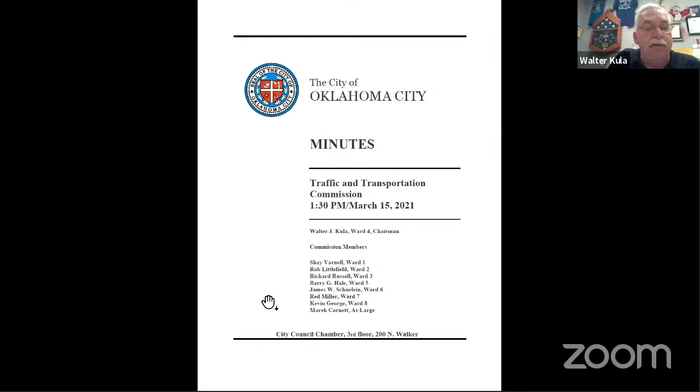We'll go ahead and get the meeting to order. First item after call to order is approval of the meeting minutes of the March 15, 2021 meeting. Do we have a motion concerning this item? I can move approval, Kevin George. Varnell seconds. Okay, so we have a motion to approve from George and seconded by Varnell. Let's get that up. There's George, there's Varnell. Okay, do we have any talk on this item? All right, so we have a motion to approve the meeting minutes of March 15, 2021 by Commissioner George and seconded by Commissioner Varnell. Can we please have the voting screen?

So this is where you would press escape on your keyboard. Jill, will you open the vote back up? Not everybody had a chance to vote. Okay, so if you're still just seeing the item at the top and where it says moved by Mr. George and seconded by Mr. Varnell in the middle, that's your Zoom screen. So you need to press escape on your keyboard, and you may have to click on your Chrome or whatever internet browser you're using on the icon on your start bar to bring up PrimeGov. And then you should have your buttons. Not happening for me, it didn't come up for me. Am I the only one not getting it? I'm not getting a voting screen. I'm sorry.

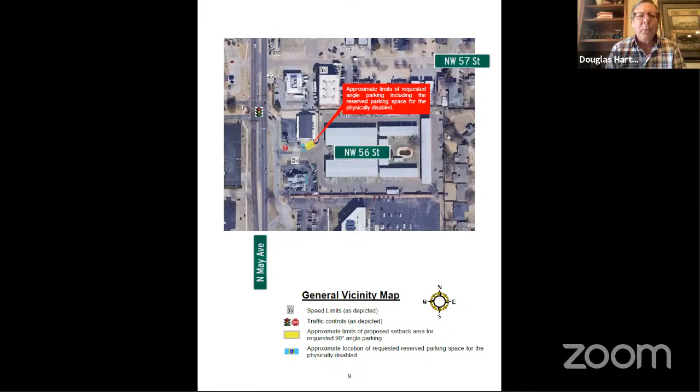Very good. This particular site is a dentist office, Pinkston Dental. It is surrounded by apartments and other offices and building types, so there's no room for him to expand his parking. He barely meets code now, but he would like to expand parking, and all he can figure out is he can get 1 additional one on his site, and he would like to add these 3 that are on Northwest 56th Street.

All right, very good. Thank you, sir. Do we have anybody else wanting to speak on item 5A? Okay, staff, can we have your input, please?

All right, well, you've got our comments before you. This is a rather unusual application because it's parking that is on the perimeter of a portion of a cul-de-sac. When we were researching into this matter, finding information or other examples of something similar to this in the U.S., it's rare. So this is kind of an unusual one for your consideration.

Action on this particular case will be at the discretion of the commission. As proposed, the 90-degree angle parking on the north side of Northwest 56th Street appears to meet or exceed our proposed angle parking standards with respect to the minimum perpendicular parking stall depths. We're not anticipating that the introduction of the angle parking area at this location is going to have a meaningful effect on traffic movement. The number of reserved spaces provided for the physically disabled, which in a small area like this is 1, would appear to meet the ADA requirements.

So at this point in time, the applicant hasn't requested any sort of restricted use for the parking spaces, whether it's time limited or otherwise. So if recommended for approval, a motion needs to include the applicant dedicating public right-of-way or roadway easement sufficient to fully cover the proposed setback parking spaces and sidewalks, and then the applicant bearing the responsibility for the preparation of the construction documents.

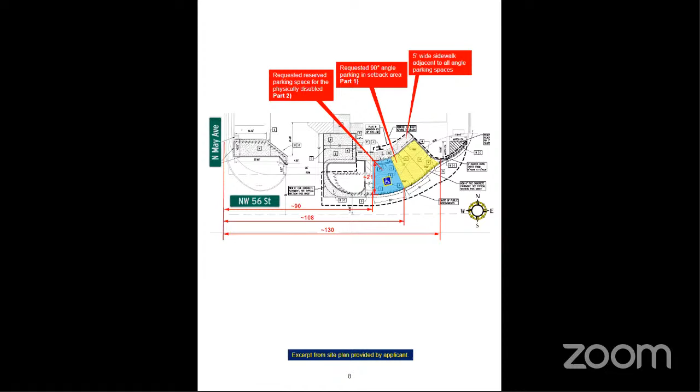And if you've got any questions on this matter, I'd be happy to answer them at this time. All right, thank you very much, sir. Do we have a motion concerning this item? Could you make it verbal to start with so we make sure we get the record. I move for approval.

I'm sorry, say that again, Mr. Littlefield. I move for approval, which includes staff comments? Yes, which includes the dedication of public right-of-way easement with the additional language and bearing the responsibility of the preparation of public improvements, construction, and the balance of the language.

Okay, and I show a second by Commissioner Varnell. Do we have any talk on this item? Nope. I'm sorry, it sounded like somebody might have been talking. No, I think no comment from me. Okay, very good. So we have a motion to approve item 5A from Commissioner Littlefield, seconded by Commissioner Varnell, to include staff recommendations.

Can we have the voting buttons, please? Kula votes yes. Mr. Littlefield, yes. Okay, item 5A has passed with all 7 voting in favor of passing. Thank you very much. Thank you for your time.

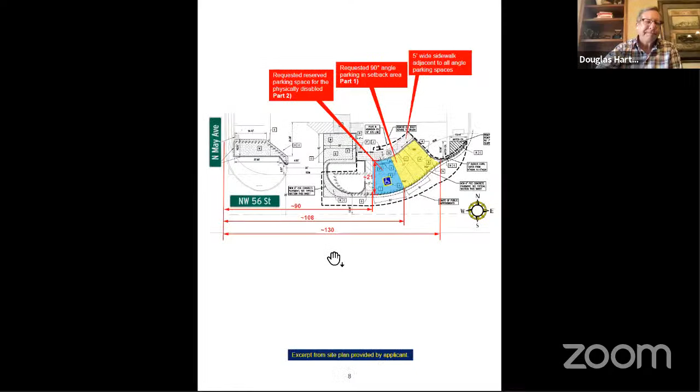Okay, now we'll go on to item 5B. Craig Sanger. Consider request to change the speed limit on North Villa Avenue between Northwest Expressway and Northwest 63rd Street from 30 miles per hour to 25 miles per hour. We have a speaker for this one.

Yes, Craig Sanger. Hi, sir. If I can have your name, address, and you have up to 5 minutes, please. Thank you, everybody, for your consideration and time. My name is Craig Sanger. I live at 2424 Northwest 56th Street in Oklahoma City. And I'm requesting that North Villa Avenue between 63rd Street and Northwest Expressway drop to 25 miles an hour. It's currently at 30. The street connects 2 major neighborhoods, Belle Isle West and Wildman's Belle Isle.

It's bookended with Belle Isle Middle School on the northern side, and the Belle Isle Library on the southern side. It's a very active community, lots of runners and walkers and strollers and bicycles. But this particular stretch of street, North Villa, does not have any sidewalks, so it's quite dangerous for the community to get out there while people are traveling down the street. 30 miles an hour doesn't seem like it's that fast, but I don't have any scientific data to back it up, but just from the eyeball test, it looks like people travel pretty quickly down this stretch of road. I think dropping it down to 25 might make it a little safer for the community and everybody that lives in the area. Thank you for your consideration.

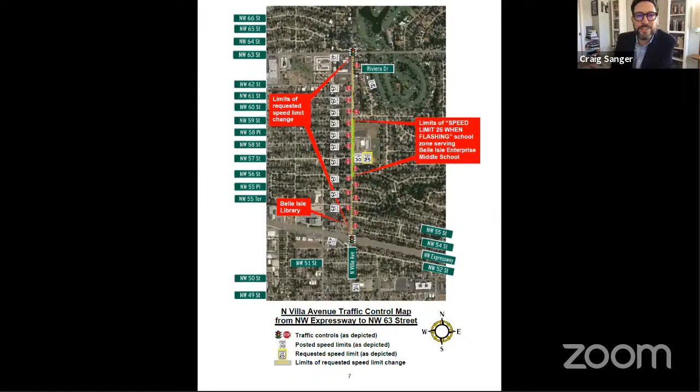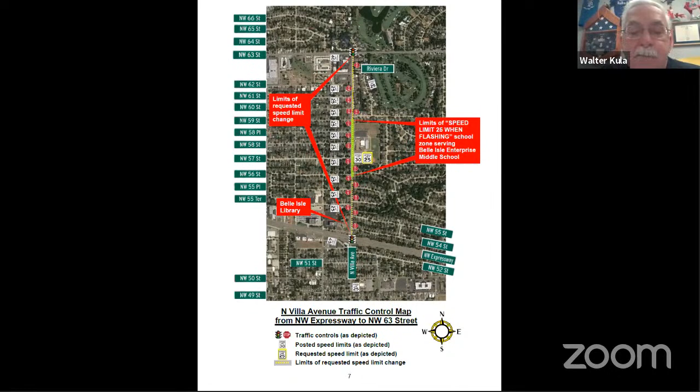All right, so thank you. Does anybody else want to speak on item 5B? Okay, staff, if you could provide input, please. All right, you've got our comments before you.

Up on your screen right now is the speed analysis that we had done in preparation for this particular case. You'll see the way that this road is currently posted at 30, that about 60% of drivers are currently traveling at or below the currently posted limit. In the range of 25 miles an hour, of course, it's posted above that. You're getting about 25% thereabouts of drivers traveling at that. Our observed 85th percentile speed is running right around 34.

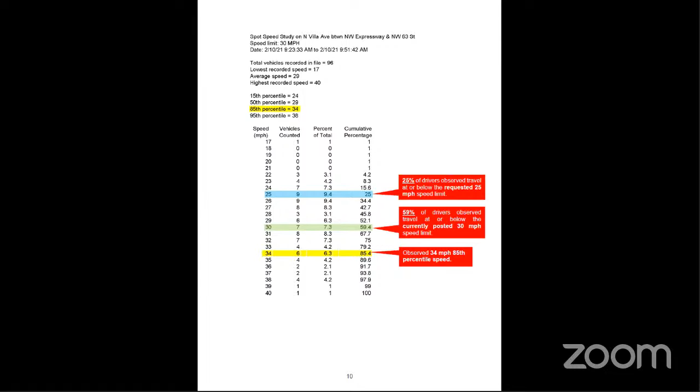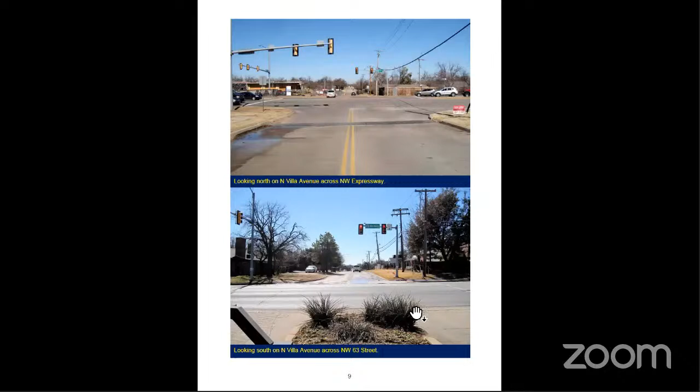All right, thank you very much. Do we have a motion concerning item 5B? For the purpose of initiating conversation, I move for approval. Okay, we have a motion for approval for item 5B from Commissioner Littlefield. I'll second. We have a second by Commissioner Cornett.

Okay, who would like to speak about this? I'd like to make a couple of comments, if that's all right. Yes, sir.

With the study that Stuart mentioned, it seems like no matter what speed limit we post, people are going to drive the way they feel the road ought to be. From the data presented, it seems like a lot of people feel the limit ought to be 35, not 30. Even if we changed the speed limit to 25, there's a good percentage of people that are going to continue driving regardless of what's posted. So I'm not sure posting at 25 will achieve what you're trying to achieve, which is to get people to slow down, because we've got people on that stretch of road right now willing to exceed what's posted.

All right, thank you, sir. Anybody else want to speak? Mr. Littlefield, you got your hand up?

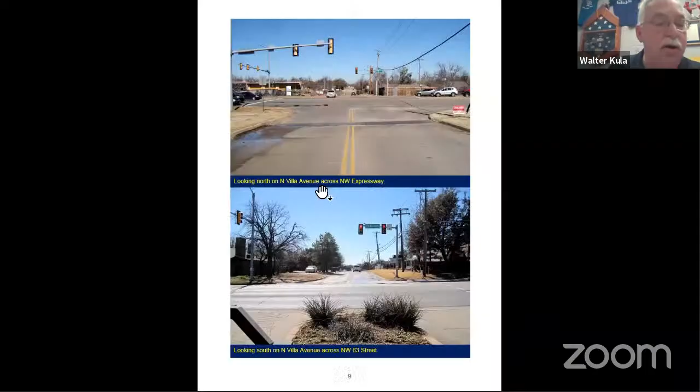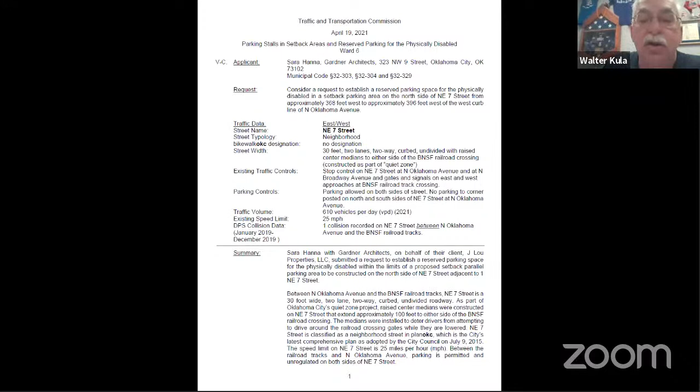Okay, we now move on to item 5C. Sara Hanna, Gardner Architects, to consider a request to establish a reserved parking space for the physically disabled in a setback parking area on the north side of Northeast 7th Street, from approximately 368 feet west to approximately 396 feet west of the west curb line of North Oklahoma Avenue.

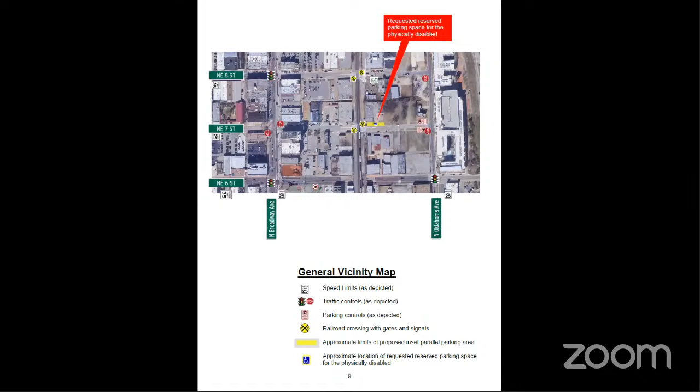I don't want to take too much of your time, but I thought I'd just say that this new development that's going to be located here is taking an existing building and turning it into a multi-tenant development, including a brewery, restaurant, and office spaces. It's something we're really excited for, and we think it's going to be really great for the community. I'm here for any questions if you have them.

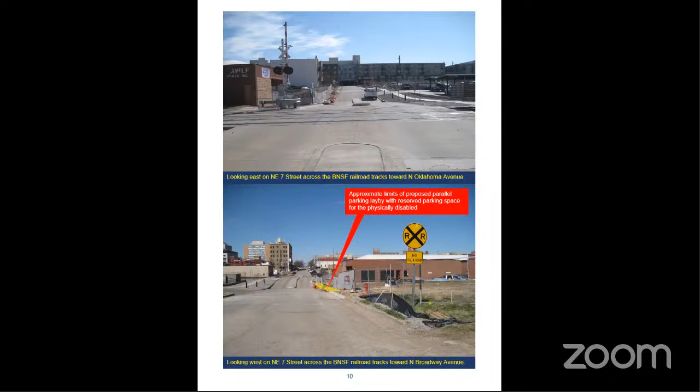All right, you've got our summary comments before you. Action on this item is at the discretion of the commission. The applicant is proposing an inset parallel parking area, and you can see where the reserved space for the physically disabled is located. It would meet the number of spaces required for the block for ADA compliance purposes. At this time, the applicant has not requested any form of regulatory parking controls to control the use of this space. So if recommended for approval, a motion should include the condition that the applicant bear responsibility for the preparation of the construction improvement plans. In this particular case, ordinarily we would comment on the need for additional right-of-way to cover the required sidewalk, but here it's all being proposed within the limits of existing right-of-way. I'm happy to answer any questions you may have.

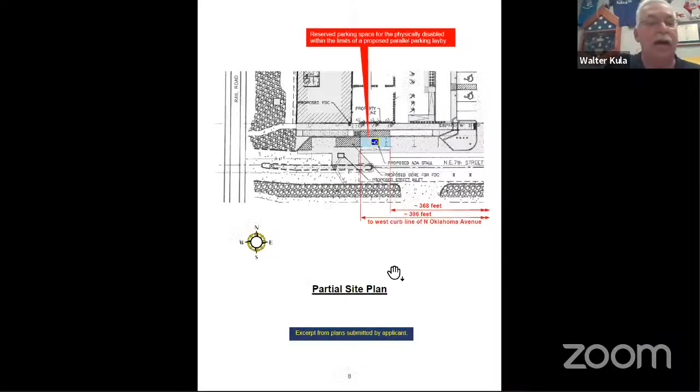The item is 5D. Lauren Gardner to consider a request for the addition of stop control on North Harvey Avenue at Northwest 14th Street to establish all-way stop control. Do we have someone to speak on this item?

Yes, sir, hi there. Can I have your name and your address, and you'll have up to 5 minutes, please. Thank you, sir. My name is Lauren Gardner. My address is 2636 Northwest 58th Street.

My children attend the daycare at St. Luke's, which has a loading zone on Harvey that takes up about the whole space from 14th to 15th on the east side of the road. I put in this request for a four-way stop sign with the input of many parents that I've spoken to, neighbors, some of which are on this call and have also signed up to speak, and church leadership.

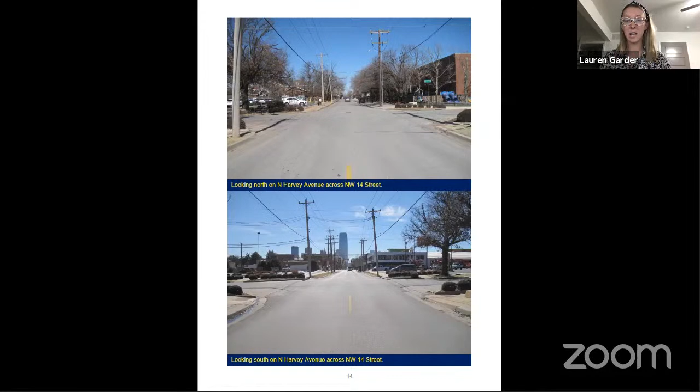And I certainly appreciate the traffic study that says the highest speed was 31. I don't know what time they did that study, I'm sure they can tell us, but I'll tell you my experience at peak pickup and drop off hours, so 6 to 8:30, and then about 4 until the center closes at 6. This is a regular problem where I'm trying to load my small children amid the 200 plus other children.

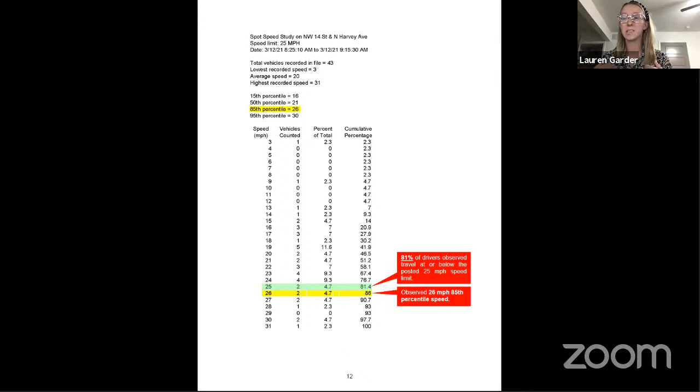And we just want to be safe, and we want increased barriers to speeding and a reduced likelihood that one of our children, or us, or a teacher, or somebody who's visiting the church would be seriously harmed by the chronic reckless drivers. So I appreciate you all considering this item and allowing me the opportunity to speak, and I'm here for any questions that you might have.

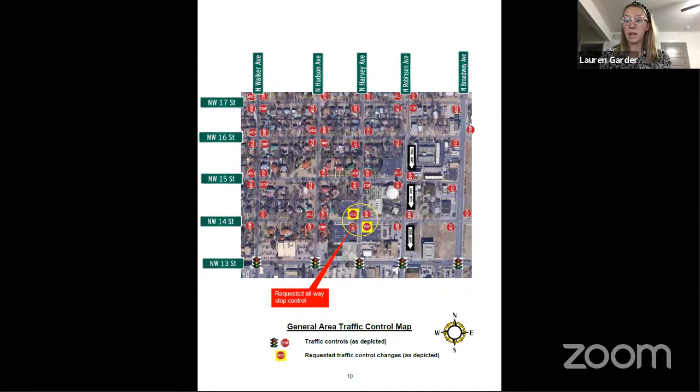All right, thank you very much, ma'am. I'm sorry, but I can't see on my screen the pop-up of who's signed up to speak, so if somebody else would like to speak, let me hear you. Good afternoon.

Okay, Mr. Greenwald, we'll need your name, address, and you have up to 5 minutes, sir. Thank you. My name is Phil Greenwald, and I serve as the executive pastor and chief financial officer for St. Luke's United Methodist Church, located at 222 Northwest 15th Street in Oklahoma City.

I'm also the corporate representative for the St. Luke's Children's Centers. We greatly appreciate the grassroots efforts of Ms. Garder and others to propose a four-way stop at Harvey and 14th Street. St. Luke's supports the proposal and appreciates your consideration today.

We recognize the traffic statistics may not support this request. However, those do not always convey the human story that you've heard Ms. Garder share behind the request. We're blessed to have more than 220 children under the age of 5 who enter and exit their parents' cars at this location twice a day between 14th and 15th Street.

We take very seriously their safety. We are not asking for flashing lights or a crosswalk, but simply stop signs as a way to encourage our friends and neighbors to slow down and to take notice of all the young lives at this location. We're grateful for your time and effort to review our request.

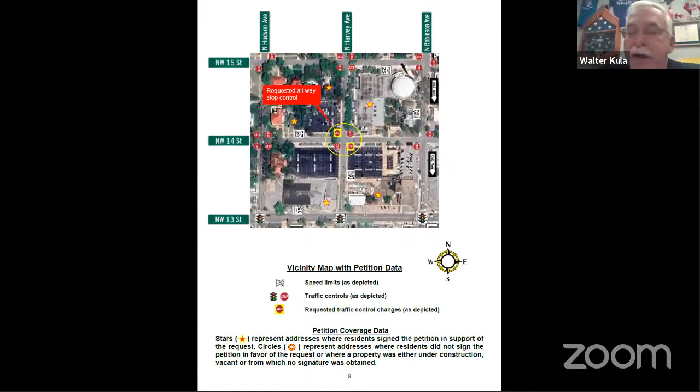Thank you. My address is 2521 Northwest 60th Street in Oklahoma City. I send my 2 children to St. Luke's on 14th and Harvey, and I work downtown at Ernst & Young. I don't want to take up too much of your time. I know we've already had a few people speak, but I did want to show the amount of support that we have from parents and members of the community.

At around 9 a.m. last Friday, we created an online petition just so we could show how many people are in support of this. We sent it mainly to parents and people in the neighborhood, and before the end of the day, within about 5 hours, we had over 140 people who supported this petition for an all-way stop. We're at over 150 right now.

Again, as the parent of 2 young children that attend St. Luke's, safety during pickup and drop off is supremely important to me, as it is no doubt to all the parents and caregivers of the over, I think, 220 children that attend the downtown campus. And there are obvious times of the day when the street is more congested than others during drop off and pickup, which also coincides with when people are probably in a rush to get to work, coming to and from downtown.

And the parking area for the St. Luke's daycare is on the west side of Harvey, so this leads to parents walking across Harvey, typically carrying at least one, and like me, 2 kids and all of their belongings. I've seen countless times when motorists are not obeying the speed limit and racing down Harvey, not paying attention to doors that are open while they're loading or unloading their children, or paying attention to the parents that are just trying to corral their kids in and out of the building.

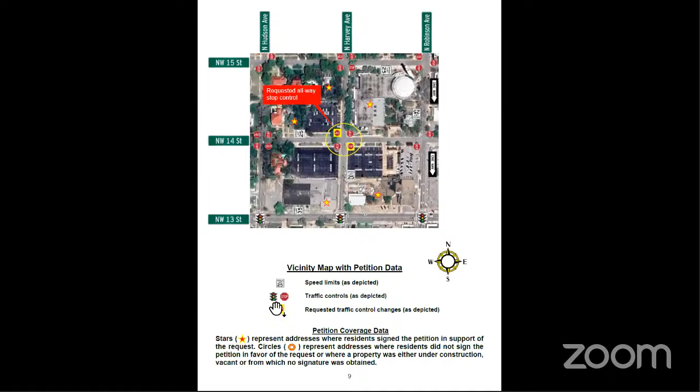So I hope that you all consider the addition of the all-way stop and see the support that we have gathered from the other parents, as I think a stop sign will make that section of Harvey safer for everybody, including the drivers headed northbound on Harvey and the parents who are in and out frequently using the loading zone. I think it would just force everybody to take a second to stop and take in their surroundings.

And we were originally going to ask a lot of parents to speak, but because of how many people seem to support it, we decided that maybe a petition would be a better use of your time. So thank you very much. All right, thank you very much, ma'am. Anybody else wanted to speak on this item?

Okay, we'll move on over to staff input. Staff, please. Well, you've got our comments before you. One item that did come up was use of warning flashers or something like that. The way the city's codes are structured, streets that are posted 25 miles an hour are not eligible for warning signals of that type. But with respect to the city and the MUTCD criteria regarding the use of all-way stop control, this particular intersection does not have a traffic volume that would meet that. There's not a collision history or experience at the location that would suggest that the use of an all-way stop is required. So action on this item will be at the discretion of the commission.

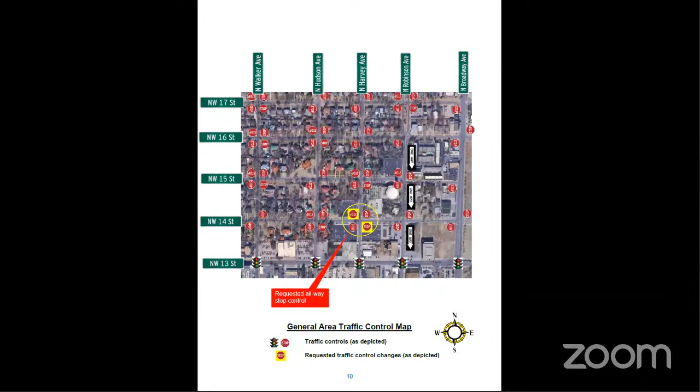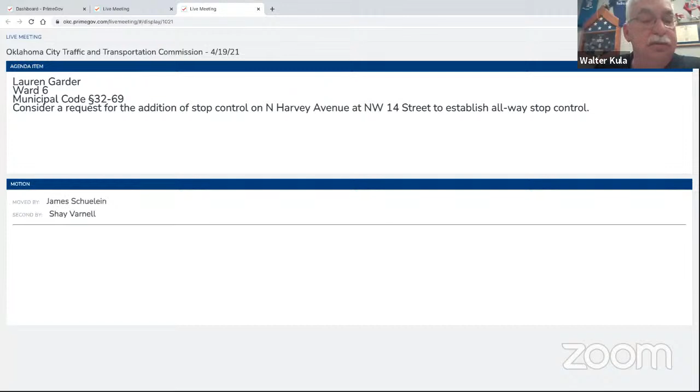All right, thank you very much, sir. Can I have a motion concerning item 5D, please? Mr. Chairman, I move the application be approved. We have a motion to approve item 5D from Commissioner Schuelein, and we're going to need a second here. Second from Commissioner Varnell. Do we have any talk on this item?

This is what a proposal should look like—the community, the people it affects most, coming together and presenting. Thank you for all the parents' work and the people who live around this area for coming together and putting together a good proposal for us, and for all the information.

Let's go to Ms. Cornett. Thanks, I just wanted some history since I'm new to the commission—coming up on a year now. A few years ago there was a master plan put into place for stop signs throughout Heritage Hills and Mesta Park, developed with a consultant. I was wondering if anyone could give historical context on why this intersection didn't make the cut then. I'm 100% in favor of approving this, especially because of the daycare—I've been down that street, it's right by my house, and I totally agree with the problem. But I don't want this used as leverage for another four-way stop elsewhere in the neighborhood, with every intersection becoming a four-way stop as traffic calming going forward, since that was already abused in my opinion when the master plan was passed. So I'd like to know if anyone can speak to that or was on the commission at that time.

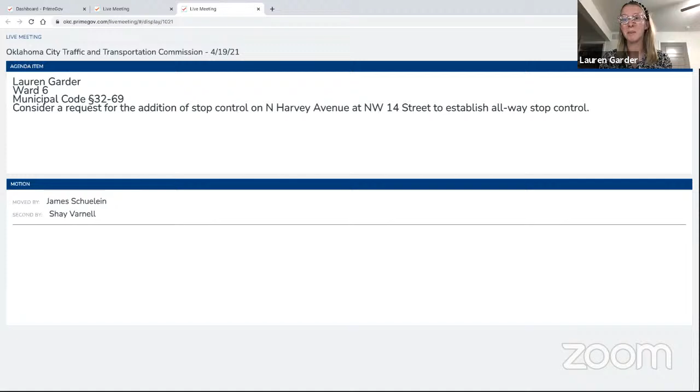Thank you. I wanted to let the commission know we did initially put in a request for a mid-block crossing about 163 feet north of the middle of the intersection of North Harvey and 14th. However, we would have had to remove our very precious loading zone to accommodate that, and the church was prepared to front any costs the city doesn't in order to do that. But our loading zone is very precious to us because it helps keep us safe amid all the other speeding.

All right, thank you very much, ma'am. Mr. Hale: Mr. Chai, don't we have some streets within Oklahoma City that are posted do not enter between certain hours, with set hours for loading and unloading of children around school areas? Aren't those currently in place?

We do have a number of locations, primarily set up to discourage ingress during certain times in order to facilitate orderly movement for parent pickup. But for a facility that's not a K through 12 situation, I don't think we have that. I'm not aware of any facilities like this with do-not-enter type restrictions tied to them. A lot of these facilities are open year-round, but most school facilities are just open the standard August through May time period. I'm not aware of anything specific to a before-and-after or daycare type facility. So it's mainly for Oklahoma City public schools.

Well, and other school districts, yes. Would that type of signage be appropriate for this section of street between 14th and 15th? Without having gone and monitored traffic circulation at this particular location, I couldn't really say at this point. We'd literally have to go out there and observe the morning drop-off and afternoon pickup. Most school facilities have set arrival and dismissal times, but a daycare facility might offer pickup times that go way beyond what's ordinary for a school, so it'd be hard to pick the times for that.

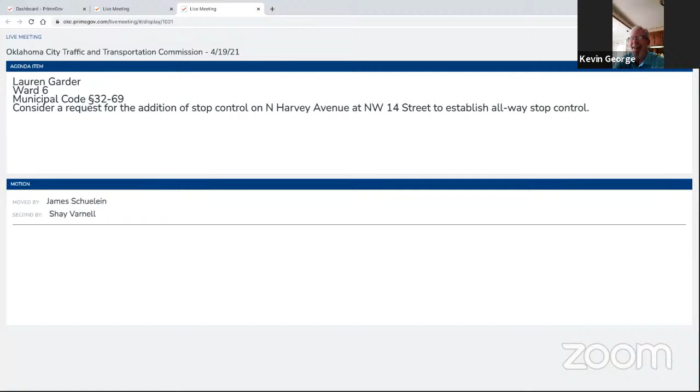One last call here for 5D. All right, so we have a motion from Commissioner Schuelein, seconded by Commissioner Varnell to approve item 5D. Can I have your votes please? Kula votes yes, Littlefield votes yes.

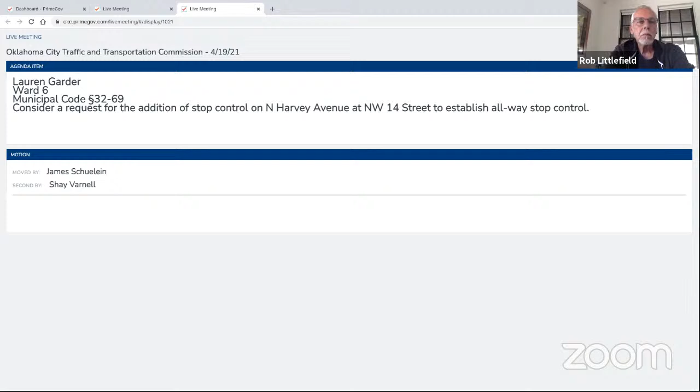Okay, the item has passed. It's a 6-1 vote in favor, and item 5D is approved. We'll go on now to the next item.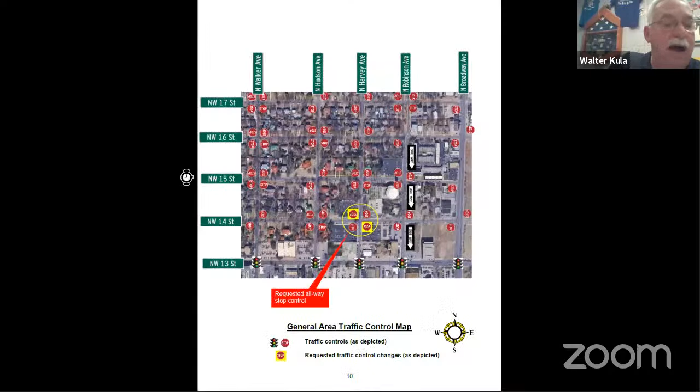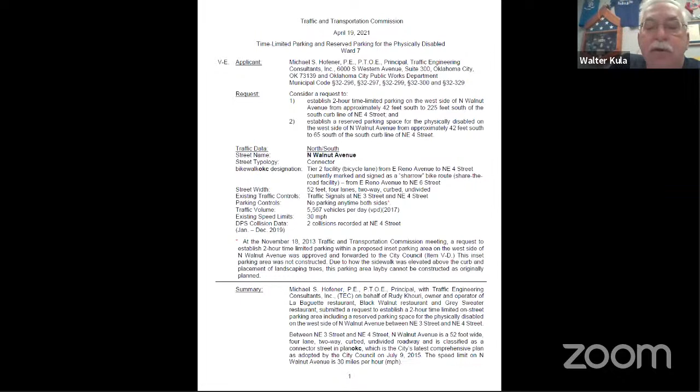Item 5E: Michael Hofener, PE, PTOE, Principal, Traffic Engineering Consultants, Inc., to consider a request to: one, establish 2-hour time-limited parking on the west side of North Walnut Avenue from approximately 42 feet south to 225 feet south of the south curb line of Northeast 4th Street; and two, establish a reserved parking space for the physically disabled on the west side of North Walnut Avenue from approximately 42 feet south to 65 feet south of the south curb line of Northeast 4th Street.

Do we have someone to speak on this item? Can you hear me? Yes, sir. All right, great, I do hear you. Let me have your name, address, and you have up to 5 minutes. Michael Hofener, and my address is 6000 South Western Avenue here in Oklahoma City.

I want to thank you for taking the time to hear this application. It was written on behalf of Rudy Khouri, who is the owner and operator of La Baguette, Black Walnut, and the Grey Sweater there along that corner.

The impetus for this is twofold: one, to provide convenient parking for those businesses along that section of roadway; and also, the additional parking would provide a barrier and a type of traffic calming, at least on that side of Walnut Avenue, for pedestrians' safety and comfort along that sidewalk. We're proposing to add 9 parking stalls with a 2-hour limit, with one of those stalls being an ADA compliant parking stall.

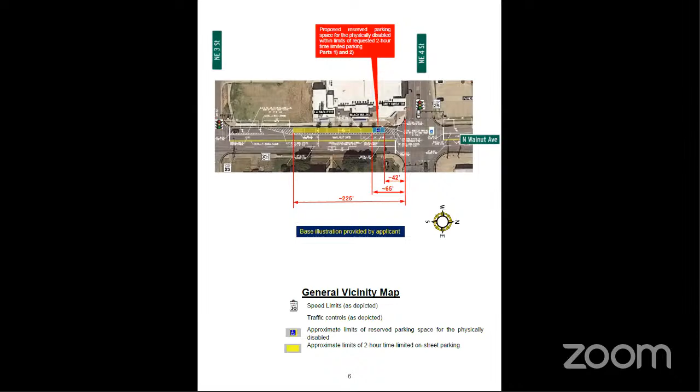Action on this item is at the discretion of the Commission, and I'm happy to answer any questions relative to the application. Thank you, sir. Do we have a motion concerning item 5E?

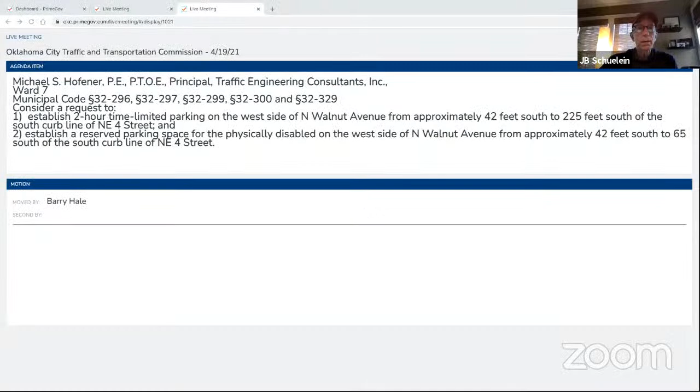Stuart, I just have a question about losing a lane of traffic, going from 2 lanes to 1. Is that okay? Is that something to be concerned about?

I'm going to defer that to Michael Hofener, because his firm was retained to do a study, basically a road diet type study, illustrated as an attachment for further information at the end of the report. They had done an analysis looking at taking Walnut Avenue from a 4-lane road down to a 2-lane road, but providing turn lanes at the major intersections. So if Michael's still on the call, I'd let him talk about the study he prepared.

Absolutely. Michael? Yes, sir, thank you, Stuart. Yes, he is correct. We were retained a couple of years ago to do a traffic study along this segment of Walnut Avenue, and that traffic study spanned from 6th Street down to 2nd Street.

We wanted to look at what the traffic volumes were along there, given different lane configurations at the intersections, as well as along the block segments, and what a road diet, as Stuart mentioned, would do to operations. Through that traffic study, we ran models of each of the intersections, and again, we looked at the segment volumes as well.

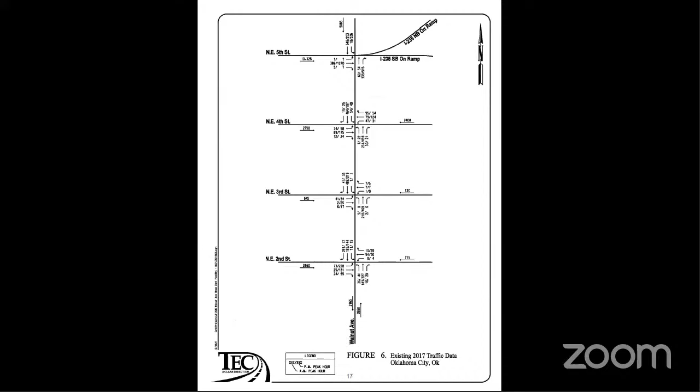The only concern was up at 6th Street, but at this point we're not looking at minimizing lanes there just because of the intense traffic. Another item of note is that Walnut Street over the bridge is essentially a 2-lane road south of this segment as well. So most of the traffic we were seeing in the AM peak hour inbound or southbound is accessing 4th, 3rd, or 2nd Street. By providing turn lanes to those streets, which we are with this application, we're looking at pretty decent operations, not too much of a drop off from what they are today.

That was my only concern, was losing the capacity. And it is a valid concern, but in this instance, given the land uses of the area and wanting to promote walkability, the give and take, in our opinion, is worth it. The operations aren't expected to decline from what they are today too significantly during those peak hours.

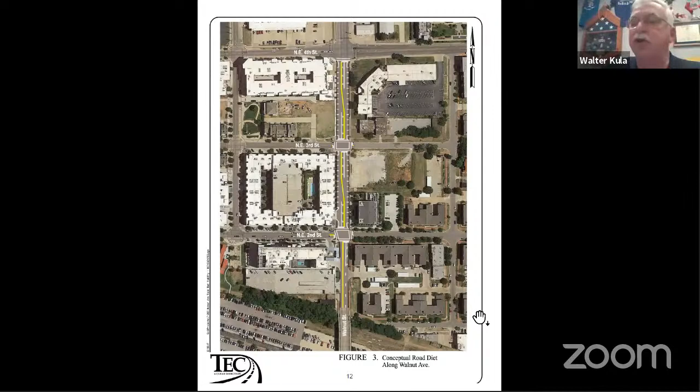Mr. Littlefield, do you have your hand up? Yes, I'm curious about the next phase of these parking spaces—where is the physically disabled space being proposed? Where would that be located?

Originally there was a proposal to put it on the north side of Northeast 3rd Street, immediately to the west of Walnut. Can you see that illustration that TEC prepared? Is that on your screens? It would be—you see the label that says Northeast 3rd Street—it would be just above and to the right of the abbreviation for street.

We'll probably look at seeing if a space could be worked into some of the existing striped spaces around the block. The issue we may run into is it may cause juggling around, because a reserved space for the disabled is not just a traditional width—it also has an accessible aisle that has to be accommodated. So at this point, we're studying the area to see if there's a location on that block between Walnut, Oklahoma, and 3rd and 4th Street, where an ADA space could be added.

My question is a curiosity, because it seems like physically disabled spaces usually always wind up at the end of a row, whether it be parallel parking or angled parking. I've always been curious if there's any real reason for that. It seems to me that if we're servicing the physically disabled, it would make more sense to put these spaces more in the center core of where the activity is, where they may be going.

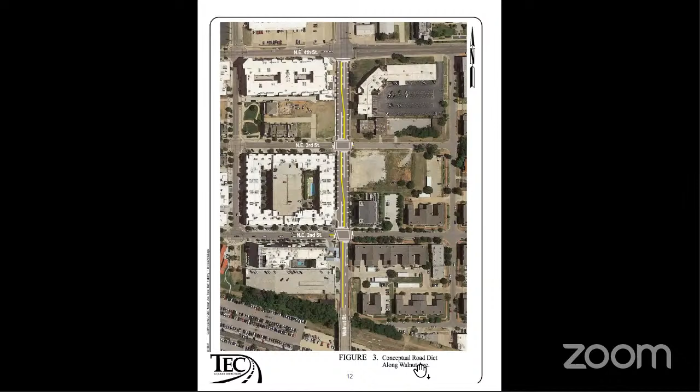The 2-hour limit is consistent with the controls already in existence on the perimeter of these blocks, so basically it's for consistency. As far as the reserved space for the disabled, it's subject to the same time limitations, because the 2-hour limit is there to encourage turnover, as opposed to spaces being used for free all-day parking. It just seems to me that turnover takes considerably more time for some disabled people than it does for people that aren't disabled.

Thank you, Stuart. All right, thank you. Anybody else wanting to speak on item 5E?

All right, so when you say tier 2, and again, we haven't had our briefing yet that we're going to have later, tier 2 is bike lane? Yeah, sorry for the jargon. Yeah, it's the bike lane. So Lakeisha will present in a little bit. Tier 1 is a protected bike lane. Tier 2 is just a standard bike lane like you see downtown. And then tier 3 is share the road with the sharrow in the center that Lakeisha talked about.

Okay, so when you say tier 1 is a protected bike lane, that means it's off to the side all by itself with probably some little plastic things. Yeah, to say it's its own thing—Walker Avenue, protected bike lane. It has, in some cases, very wide buffers, but it also has delineators that give high visibility. Right, so that's tier 1. Tier 2 is just what we've used to have as bike lanes, with just a little white line that says bikes to the right. That's right, and that was what was planned here in Bike Walk OKC.

There are various reasons for why it would be a tier 2 over a tier 1, but one of those is just the amount of space involved. You need a little more space for a tier 1.

When we do stuff like this and change the whole road, then when it comes time for you to look at that area and finalize plans, you would then probably have to go to a tier 3.

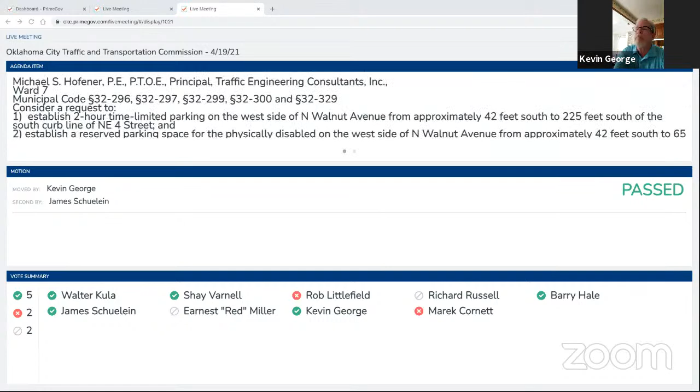Okay, next item, 5F. Not popping up on the other one, so I'll read it on this one. 5F, Judy A. Nickelson. Oh, took that off.

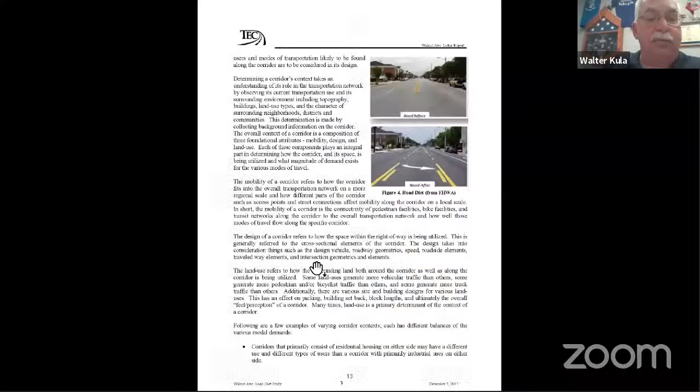Well, on the meeting viewer, it's not popping up. I can't read it right now. So Stuart, don't change yours. Let me read it off of yours.

5F, to consider requests to establish 45-degree angle parking within a proposed setback parking area on the east side of South Broadway Avenue from approximately 34 feet south to 126 feet south of the south curb line of West Oklahoma City Boulevard.

2... Put it back, please. I'm reading off the shared screen. Could you put it back, please?

There we go. 2, a reserved parking space for the physically disabled on the east side of South Broadway Avenue from approximately 112 feet south to 126 feet south of the south curb line of West Oklahoma City Boulevard.

3, 15-minute time-limited parking on the east side of South Broadway Avenue from approximately 34 feet south to 62 feet south of the south curb line of West Oklahoma City Boulevard.

4, 2-hour time-limited parking on the east side of South Broadway Avenue from approximately 62 feet south to 126 feet south of the south curb line of West Oklahoma City Boulevard.

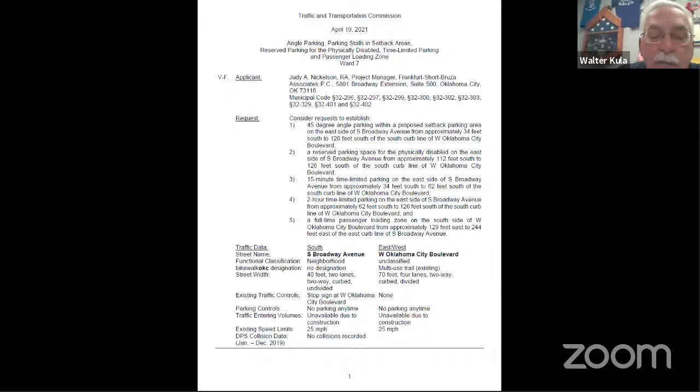And 5, a full-time passenger loading zone on the south side of West Oklahoma City Boulevard from approximately 129 feet east to 244 feet east of the east curb line of South Broadway Avenue. Do we have anybody here to speak on this item?

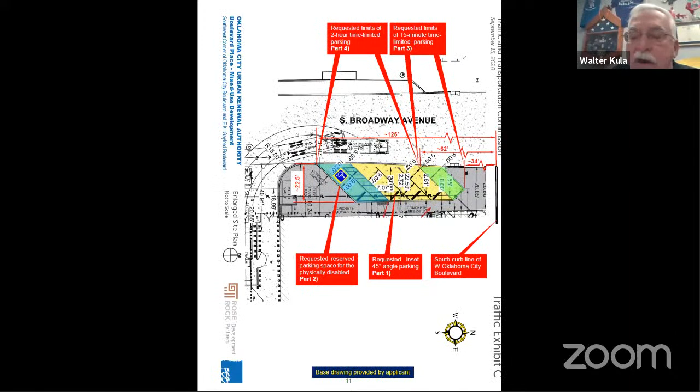Yes, you do. I'm Judy Nickelson. Hi there. Hi, if I could have your address and you'll have 5 minutes. Yes, Judy Nickelson with FSB. Address is 5801 Broadway Extension, Suite 500.

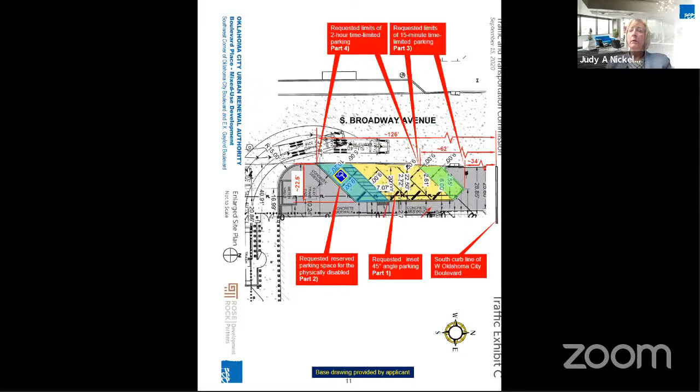Our developer is working with OCURA on a mixed-use development with apartment units and retail that is down in the CBD district across West Oklahoma City Boulevard from Chesapeake Arena and immediately adjacent to the parking structure that was recently built for the new convention center and across Broadway from the Omni Hotel.

We have requested the parking and the drop-off primarily for use of residents and for use of the community. We would like the passenger drop-off to be for visitors to the building who are simply dropping someone off to go visit, so it's not intended to have anyone waiting. Any deliveries will go down Broadway to a backyard that is a courtyard for deliveries and for use for trash removal. And then we've added these few parking spaces that could be adjacent to Omni and our property.

The one immediately to the north, as you see on the attachment, is requested to be 15-minute because there's potential for a restaurant on that corner, and that would be for them to do curbside pickup.

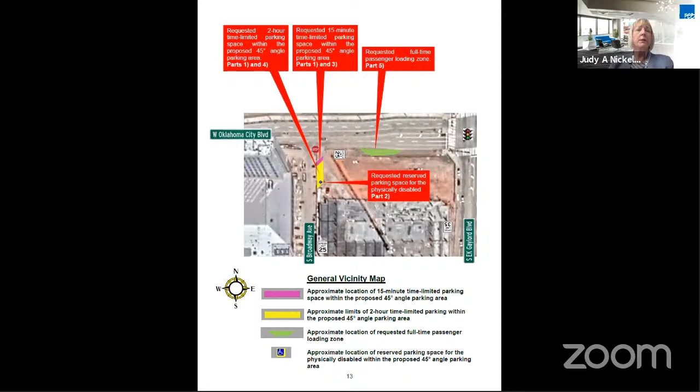If you have any questions, I'll be happy to answer them. And I also have a civil engineer here. If we get very technical, I'll call on him. All right, thank you very much, ma'am. Anybody else wanted to speak on this item?

Okay, staff, can we have your input, please? Certainly. Okay. You heard Ms. Nickelson give a summary on what the anticipated curb uses are going to be for this upcoming development.

The passenger loading zone that you see on West Oklahoma City Boulevard, they've asked to be made available on a full-time basis. The angle parking zone that'll be on the east side of South Broadway Avenue is requested to be set for 2-hour time limited.

It'll have a reserved space for the disabled at the south end and that 15-minute space on the spot at the very north end of it. With respect to the depths of the spaces, they seem to be in accordance with proposed changes that we'll be submitting in the near future for angle parking standards.

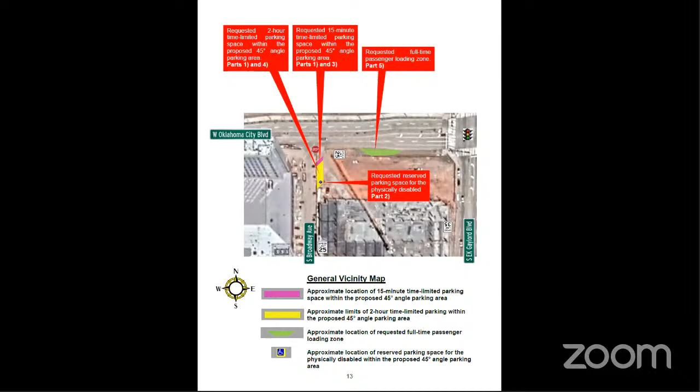And beyond that, if you've got any questions, I'd be happy to answer them. So if recommended for approval, staff would ask that they would be in accordance with the staff recommendations listed above the action required. I'm happy to answer any questions you might have on the application. All right, thank you very much.

Do we have a motion concerning item 5F? Move approval. Okay, we have a motion to approve with staff recommendation, sir. Yes, sorry, with staff recommendations. Okay, we have a motion to approve from Commissioner George to include staff recommendations. We have a second. Second. We have a second from Commissioner Hale.

Oh, there you go. So we have a motion to approve from George, seconded by Hale, subject to staff recommendations. Any discussion on this item? Okay, we have a motion to approve item 5F from Commissioner George, seconded by Commissioner Hale.

Can I have your votes, please? Kula is a yes. Littlefield is a yes. Hey, popped up.

At the end of a 2-hour meeting, I can finally vote. All right, all 7 have voted in favor and the item has passed.

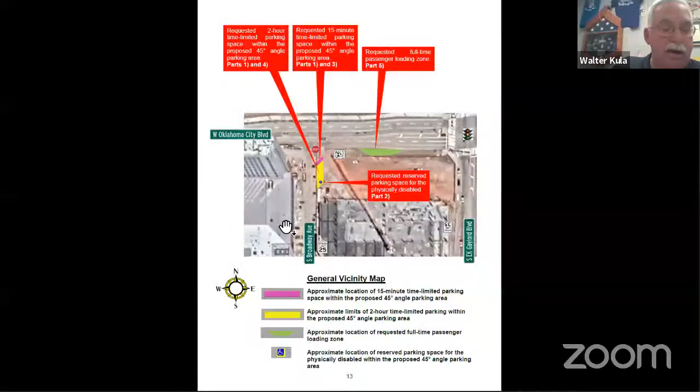All right, then we go on now to item 6, comments from citizens. Anybody out there wanted to talk to us? Anybody want to talk? Okay, we go on now to item 7.

Items from traffic commissioners, et cetera. We'll go through the list here. Commissioner Varnell: I'm glad we're having our meeting. I love the spirited debates today, and I look forward to us all getting back together in person, hopefully soon.

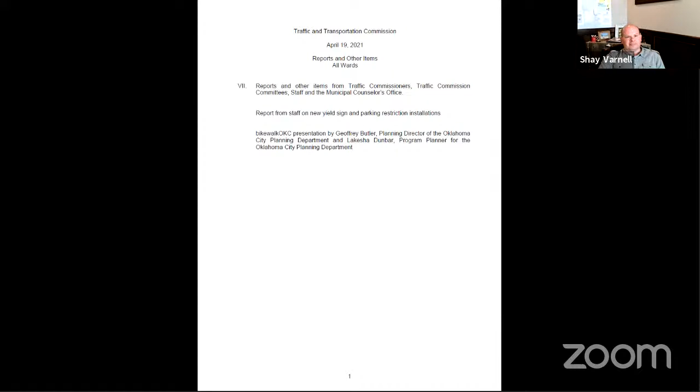Thank you very much. Commissioner Littlefield: You'll all be glad to know I have said enough. Thank you. Commissioner Hale: No, nothing to add. Thank you. Commissioner Schuline: Nothing to add. Thank you, sir. Commissioner George: Nothing to add. Thank you. Commissioner Cornett: I am good.

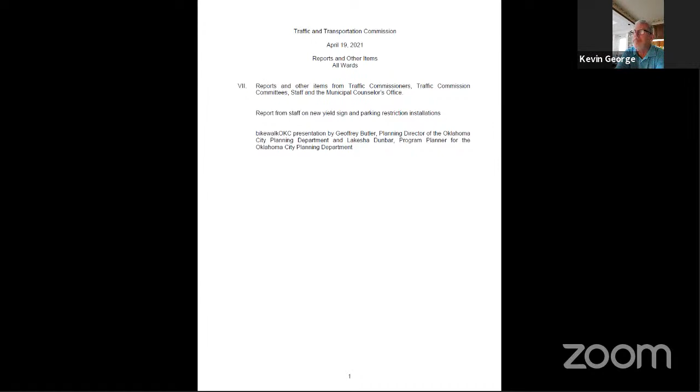Thank you. Okay, anything from Oklahoma City Police? No. How about from the lawyer's office? Anything else for us? No, thank you. All right, thank you ma'am. Staff, what do you have?

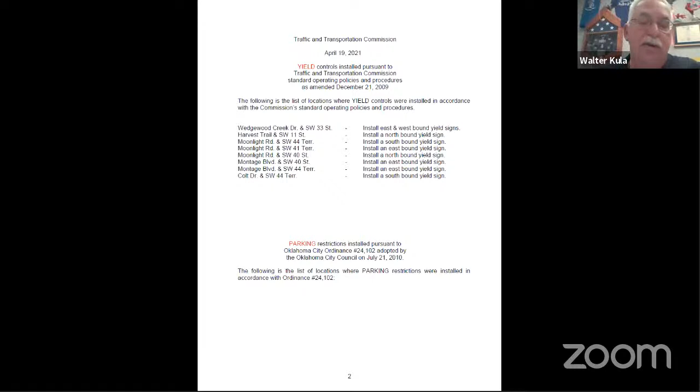All right, well you've got before you our monthly report on yield and parking restrictions that we've been able to install administratively. And at the end of last month's meeting, Commissioner Littlefield had asked for a presentation from planning staff on Bike Walk OKC, because he and Commissioner Schuline are participants in the advisory group working with that staff as far as updating that particular plan. We have the Planning Department Director, Geoffrey Butler, and Transportation Program Planner, Lakesha Dunbar, here today, and they are going to take over the meeting at this point in time.

Hold on one second. Certainly, if I remember correctly, we want to go ahead and finish out most of this meeting, except for that briefing, and then I'll adjourn afterwards. That's correct, I was just getting to that. So all right, if you've got any further questions for me, this will conclude my portion of today's meeting, and Mr. Butler and Ms. Dunbar will handle the rest of the meeting relative to their presentation on Bike Walk OKC.

Okay, well, I do. Was it your recommendation, May or June, for us to skip because of staffing, et cetera? We are going to be exceptionally shorthanded for the June meeting. Okay, so that's what I thought. We're working on a bunch of items for the May meeting, as usual. Okay, but June will be particularly hard pressed. Okay, so for all the traffic commissioners, May will be our regular scheduled meeting, and then maybe June we may cancel, but we'll talk about that at the May meeting.

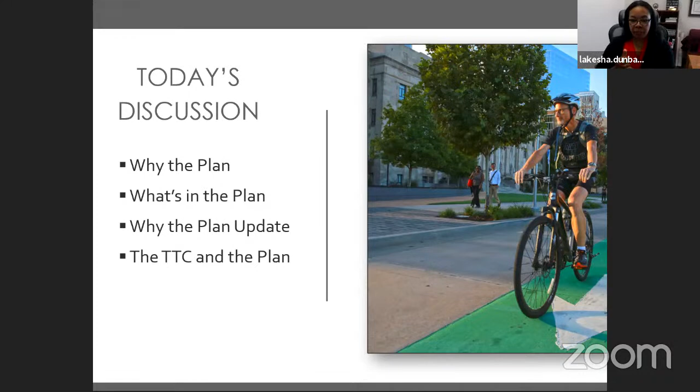I'll go off script, but on those first bullet points I'll pretty much be on script and talk fast. But when we get to that 4th bullet point, I'll have a few examples of current and future projects with scenarios on how you all may have influence on the success and progression of the proposed designs. Kind of like we just did with 2 projects, it was a great example of how you all can interact with the plan. So with that, I'll get started.

So let's get right into it. Why Bike Walk OKC plan? First, I would like to start with a point that I hope is hard to refute: everyone is a pedestrian. Every trip we take, we all walk, or even those who use aids to maneuver short distances, we are all considered pedestrians.

With that aside, there is an observation that more people desire to walk and cycle, locally and nationally. The Bike Walk OKC plan helps city staff and administration identify ways and locations to make walking and cycling safer in Oklahoma City by connecting neighborhoods to jobs, public transit, commercial districts, schools, and parks. It also identifies ways to reduce barriers that make it challenging to safely walk and bicycle in and around the city.

And there are some added benefits to better cycling and walking networks. One, it increases transportation options to balance the needs for all modes. I think we heard that sentiment a little bit earlier. It also identifies safer networks for all ages.

Ages — we kind of have this mantra of ages 8 to 80. You may have heard that. So with cycling and of course with walking, we want to make all of our networks safe for ages 8 to 80. And we heard even earlier, for 1 and 2-year-olds, we want to make it safer for even toddlers to be able to walk and maneuver throughout their communities.

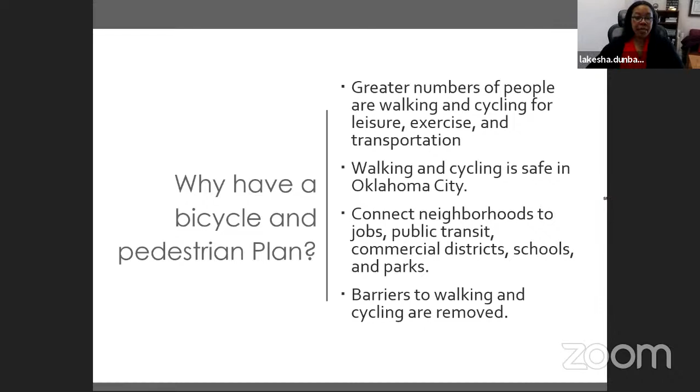Also, the bike plan identifies ways it helps make healthier communities through increased physical activity, and in this climate, through reduction in traffic and emissions. All of these goals you see listed here align with Plan OKC and also align with City Council priorities.

So what's in the plan? Next, I would like to quickly describe what is contained in the plan document. We talked a little bit earlier about tiers. I didn't plan to describe the tiers to you today, but it sounds like that is something we do need to educate you all on. I do want to mention that this is not the only opportunity for conversation about how your commission and how you all can interact with the plan.

We would be glad to schedule a workshop and come back to give you more details about what's in the plan, particularly those tiers we talked about and how those are defined.

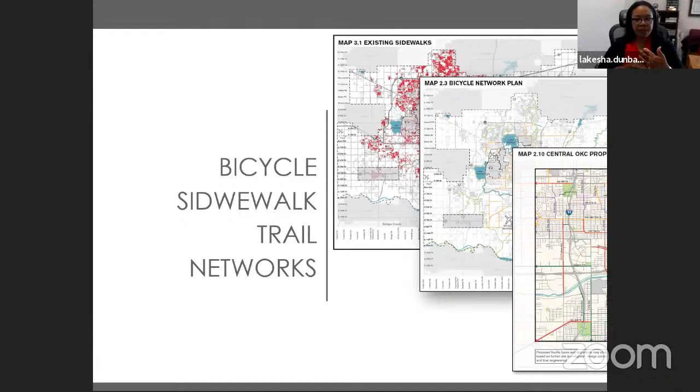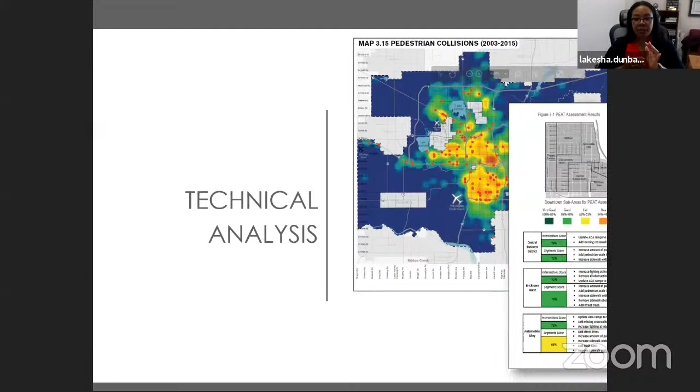But for today, I just want to remind you that the plan is comprised of chapters that focus on bike, trail, and sidewalk networks. The plan also contains in-depth technical analysis of demographic and geographic information used to identify the locations that make up the bicycle, sidewalk, and trail networks. And the plan also contains a variety of prioritization processes by category, such as schools, parks, and transit, which are used for project selections.

I'll show you later where we come up with lists of projects that could be funded. And then lastly, in addition to the networks, the technical analysis, and the prioritized list of projects for capital improvements, there are performance measures and a variety of categories of action necessary to accomplishing the goals of this plan.

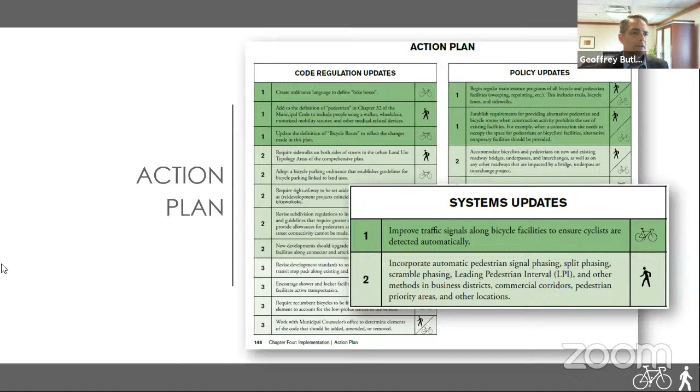Okay. So I was sharing, I thought, the PowerPoint presentation itself. Are you still seeing the same thing? There we go, that looks better. It is better? Yeah, thank you. Okay, now let's see if it works with my maneuvering here.

Okay, so I'm not seeing what you're seeing. One second. Are you seeing action plan? Yes. Okay, yes we are. All right, so now are you seeing why the plan update? Okay, yeah, all right, okay.

So I just talked about what's in the plan, and now I want to talk about why the plan update, and why after only 3 years. Why update the plan so soon after it was adopted?

The plan was adopted in 2018, and here we are in 2021 updating it. In my previous practices, updating a plan of this size and scale in 3 years is kind of unheard of, but that's a good thing for the city of Oklahoma City.

The city has been strategic in identifying and allocating funding for bicycle, trail, and sidewalk projects, which started well before the adoption of the plan, through the bond and sales tax election voted on by Oklahoma City residents, and also by applying for federal funds. So that's a great thing.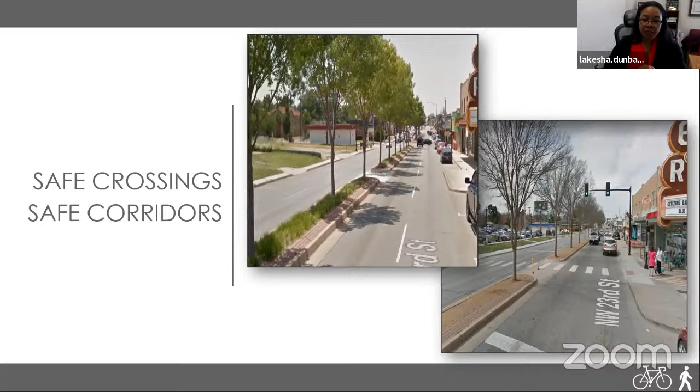I want to note, as mentioned earlier, that bicycle facilities and sidewalk amenities can be used as traffic calming tools. In preparing for today's presentation, we discussed internally that we may consider adding a traffic calming section to the plan, or seeing how our plan can coordinate with the Traffic Commission's traffic calming plan. This might be done in conjunction with the new safe crossings and safe corridors component.

So how is the plan used? I think today was a prime example of how we use the plan. In the plan we have a plan implementation section, and this image is a page that displays the overall process. After we prioritize the projects, we work to get funding, then coordinate on the design and implementation.

We coordinate with Public Works and work hand in hand on implementation of the projects through design, hiring consultants to do the design, and then implementation, making sure the designs accommodate what Bike Walk calls for.

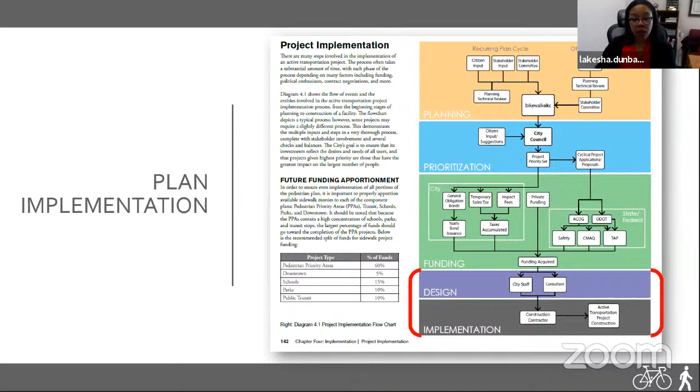This is an example of the list of prioritized bike projects found on page 112 in chapter 4, and this is just a sample. We have multiple pages like this in the plan. The implementation chapter has lists for bike, sidewalk, and trail projects, and staff references these pages constantly as our checklist for projects to be funded and constructed.

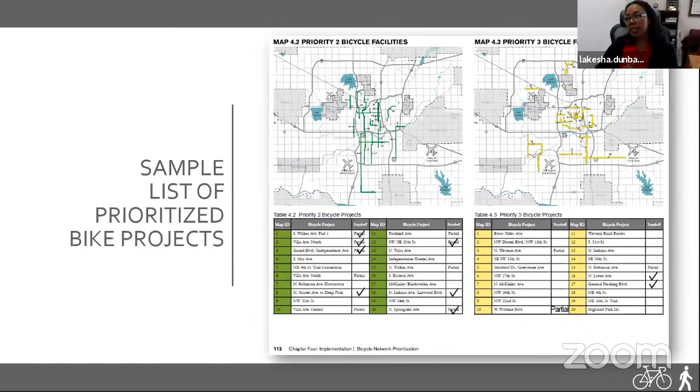This is similar to the bike funded projects example—this one shows the sidewalk prioritized list of projects, specifically for the pedestrian priority areas. That's a term we use for areas defined in our plan as key areas prioritized for sidewalks. Maybe later in a workshop we can give you more background on these priority areas.

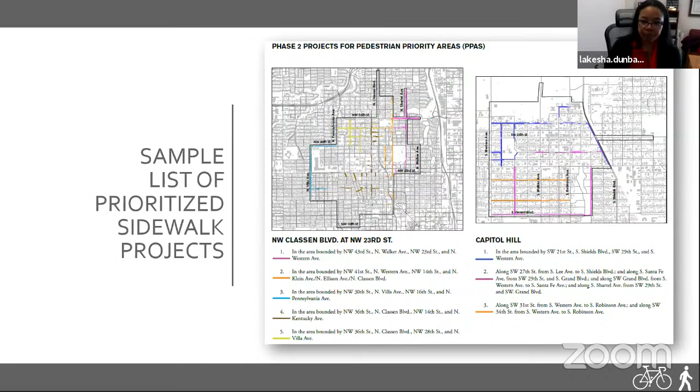Before we get started with this next section, are there any questions on the plan and its update? Before we get into questions, I'll say this is where we're really going to get into the meat of things and pick up where we left off in the meeting with some of your agenda items. But are there any questions about what I've just shown you?

I do, Shay does. What would my neighborhood have to do to request a sidewalk along MacArthur Boulevard between Britton Road and Hefner?

So we take requests. Sorry, was that the end of your question? Yep, that was the end of it.

Okay, so we take requests daily. We get requests by email and phone calls on a daily basis. The process we go through is we look to see first, is it already identified in the plan? Is it planned? If it's not planned, we have a database, and we add it to our list of requests. Now with the plan update, we're taking those requests, mapping them, and going through that prioritization and technical analysis process that our previous reviews went through. We'll take them through that review process, see if they get prioritized up, and then make recommendations going forward to receive funding, depending on how it gets prioritized. Thank you for the question.

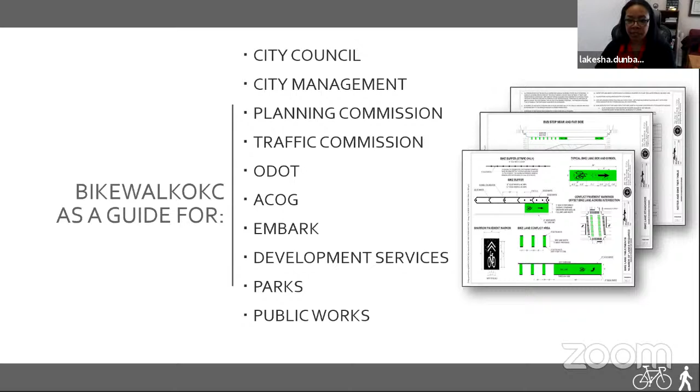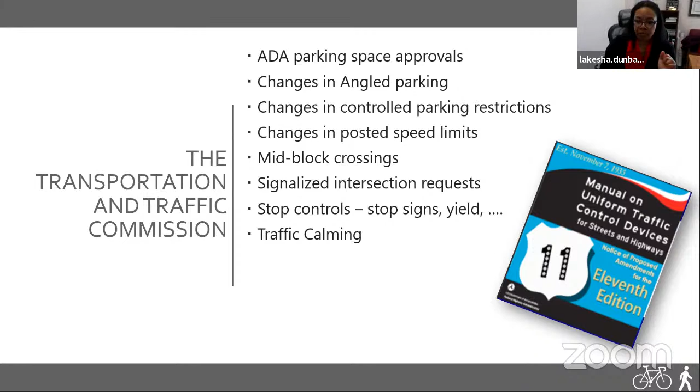Now I'm totally off script. The first two images, which you may have received in your packets, are of projects you all have already reviewed at some point. I've included a total of 6 locations. We may not have time for all 6, and that's respectfully noted—I want to be respectful of everybody's time. So we don't have to go through all of them, but there are 6 distinct locations I've included for us to talk through.

This first one is the 39th Street Enhancement Project. I believe you all reviewed this not too long ago—actually it was in January. This was an agenda item for your commission to review. I'm just bringing it up, and I'll open it up for discussion at this point. I don't have any specific talking points related to these images, so let's just talk from here.

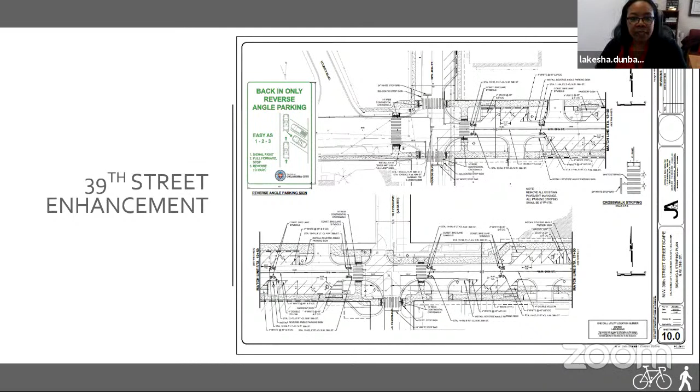I just want to say thank you so much for making this happen. I think we've learned today that there are going to be items coming before the Traffic Commission that will have a reciprocity one way or the other with the bike walk plan—that was evident today. I've got a couple of questions, like a specific incident. For example, what if a designated bike lane were considered to go through a neighborhood street, or a portion of a neighborhood street? Is there consideration to remove on-street parking to accomplish things like that?

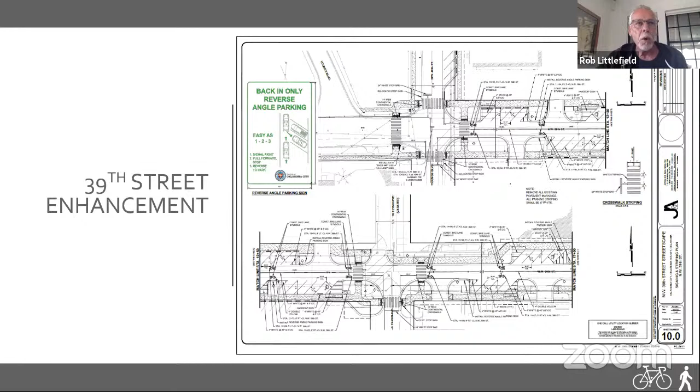Would there be incidences where something similar could happen, perhaps in an existing older business improvement district, where we're exchanging parking spaces for bike lanes? It would seem to me that if we do, that would have to be an item to come before the commission to remove those spaces. Although I'm also confused about an item the commission approved in the past couple of months, where Director Wenger was administering that meeting, and that was his application. I wasn't sure on the language after the fact whether or not that gave this program carte blanche to remove those parking spaces in neighborhoods or not. I'm just not real clear on that.

Great question. You mentioned two scenarios that I heard: one is kind of a residential area, and another is a commercial district. So I did include two projects here to talk through that, where we have not come forward yet, but will likely come forward soon with requests as it relates to how the bike project will impact existing parking conditions.

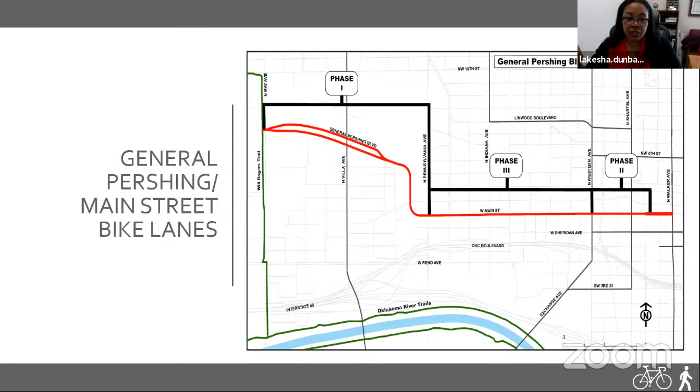Today I really wanted this conversation, the question you asked Mr. Littlefield regarding the Main Street portion, which is a project proposing to do a road diet. It's currently four travel lanes. The plan proposes basically two designs because the road is wider in one section, from Indiana going west back to Pennsylvania. There it's wider, so we're planning to get a 3-lane cross section, hoping to accommodate on-street parking and then include a tier 1 bicycle facility on both sides of the road.

So this is kind of the commercial district area you're referring to, Mr. Littlefield. Right now, block by block, there are different scenarios as to the current parking conditions, but essentially parking is permissible for this whole corridor. So this is one where we're planning to bring forward to you a request for some changes in the parking. I don't want to get into the details of what those requests are right now, and I don't think we have time for that. But what we are gearing up to do is bring this to you all as a request, and it'll probably be multiple petitions, multiple requests by block. We are petitioning the corridor as it relates to the needs for each block.

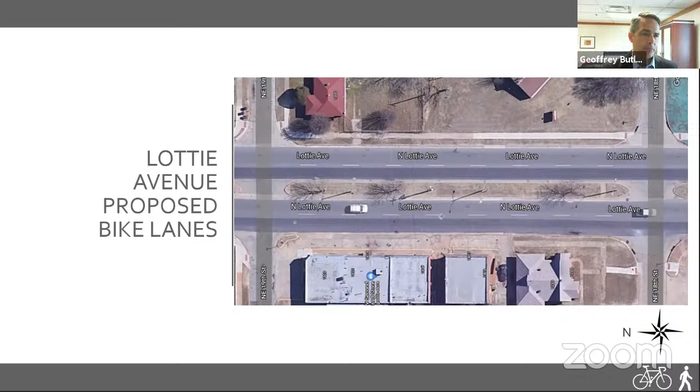Main Street is something you just mentioned already — we're in the process and things are going well there. We're having a lot of conversations with property owners and business owners about the project, getting their feedback and their approval through the petition. It's complicated because retrofitting these streets is a big design challenge, and each site has its own unique needs with their parking and driveways. So far so good, though some folks have more difficult sites than others.

But yeah, we intend to do that on Lottie as well, to do public outreach. We sent postcards, as Public Works often does, to every site, every business, so that we could gauge their interest. If they're interested, they have the opportunity to set up a meeting or give us a call. We reached out to many that we know would be impacted — for example, if the design calls for a reduction in their parking spaces in front of their building, we're reaching out to them in particular to see what we can do to mitigate. That's going to be our standard practice.

All right, very good, thank you. I had a quick question before we move on — a couple of months ago in our commission meeting, we basically approved moving forward with car-protected bike lanes, and I didn't know how that was going to impact things. If things are starting to come to us, but car-protected bike lanes are eventually going to be possible and we've approved it, is it just a matter of paint being changed and we figure it out as it happens, or is there any kind of preparation for the lanes that are potential car-protected bike lanes?

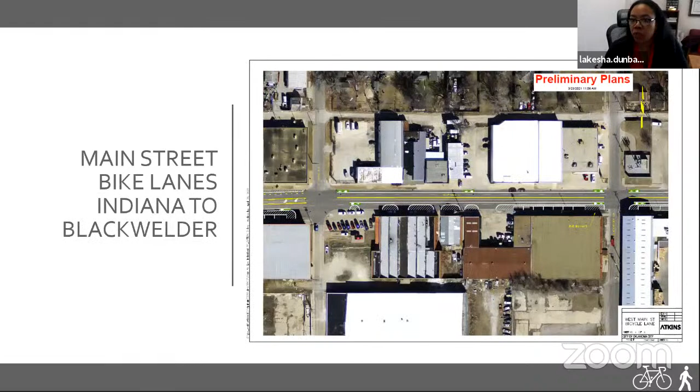So are there any other questions? You may have seen the images in your packet. I know it's been a long meeting here. Are there any of the images in your packets that you'd like to refer to or have a question about, and maybe why it included it, or what our plans might be, and how it may impact the Traffic and Transportation Commission?